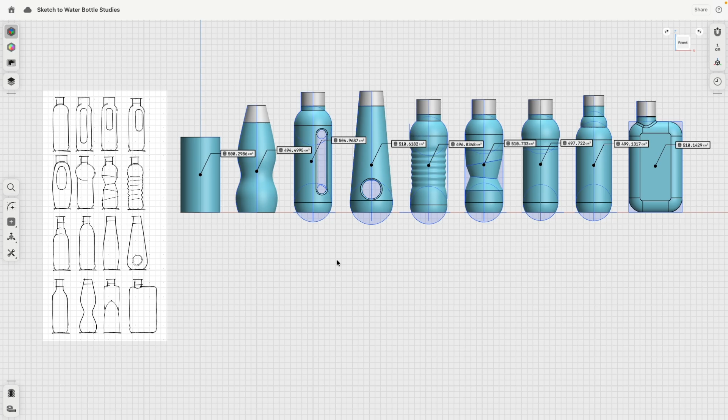Let me show you how I structured this design. So I brought in this image. By the way, you can bring in the image via the add image command, and then you might have to position and scale it correctly. The download link to this image is in the description of the video.

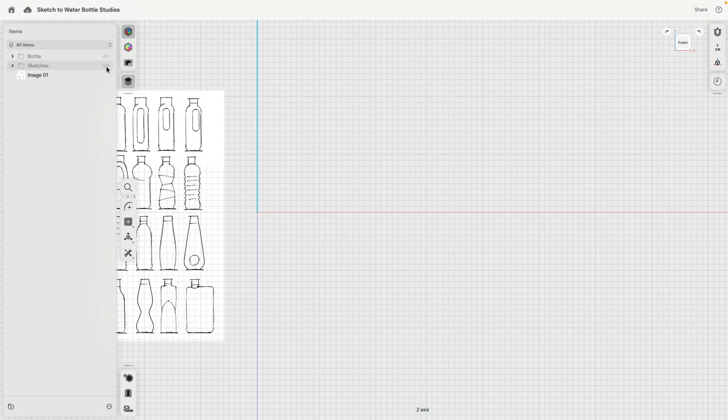And then I created a sketch, as you can see here, and this sketch has all sketches for these different bottles included. Here's a rectangle—I noticed that a rectangle 3.5 by 13 centimeters is around 500 milliliters.

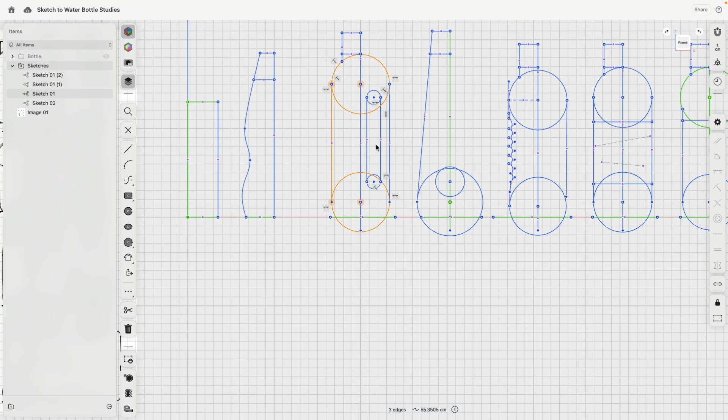So then I made a copy of this. You see here I added a spline, using the fit point spline. Then I brought in circles and lines, made circles and lines on the inside, revolved those, and cut this out.

Here I used just the control point spline to create this wave line and so forth. So you see the geometries are all really very basic, and even here the last one is just boxes.

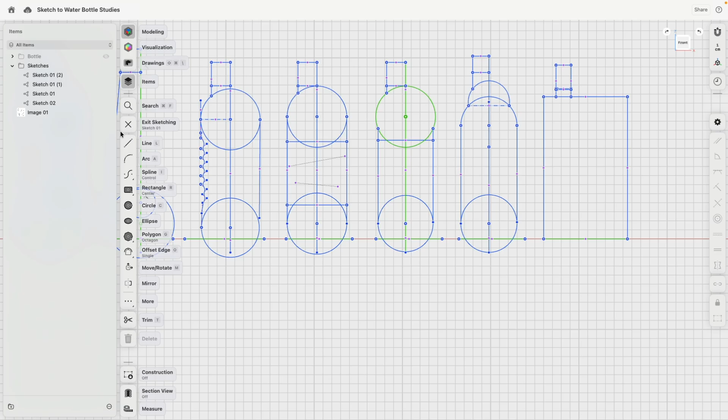And then you can use the modeling tools: revolve, boolean, extrude, and cut. Here this is lofted, and you see these edges were filleted. Then these edges were filleted, and then here this part was filleted—so a little bit more detail.

But the main idea really is to keep sketching and 3D modeling to the bare minimum and produce many different ideas so you can compare them.

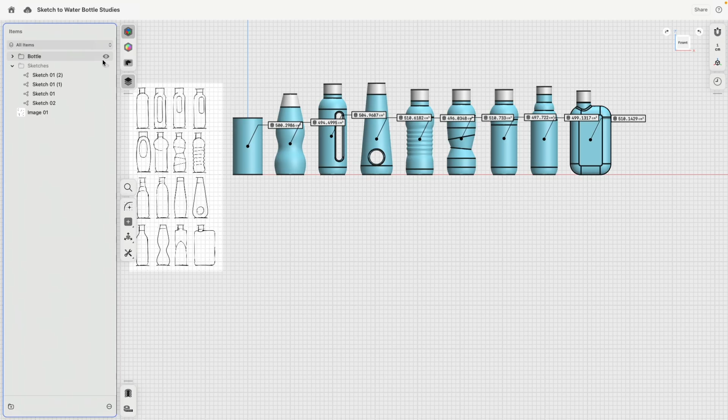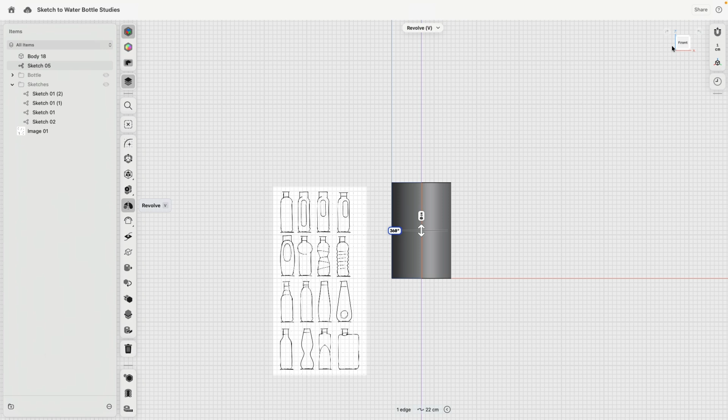Okay, so as a quick introduction, I'll also show how to start. We could create a sketch, and I will turn everything off here. I'll make a line there, there, there, there. Very good. Then I can select the face and an axis, do a revolve, select the whole body, and go to measure.

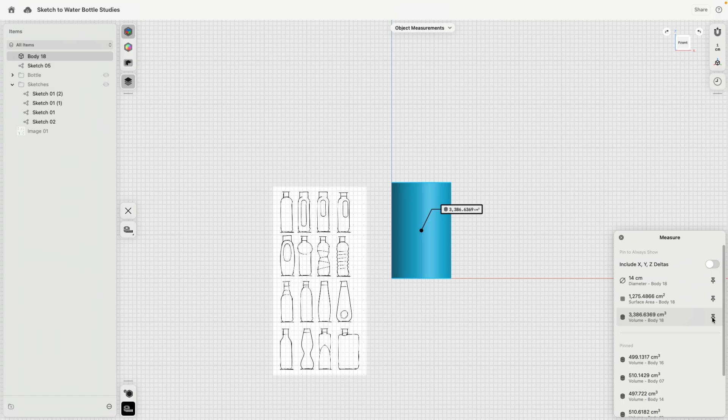Then here I see the cubic centimeter that has to go down to 500—then I have 500 milliliters. So the volume obviously is incorrect. What I can do now is play with the width and play with the height, and you can see how the volume is always being updated.

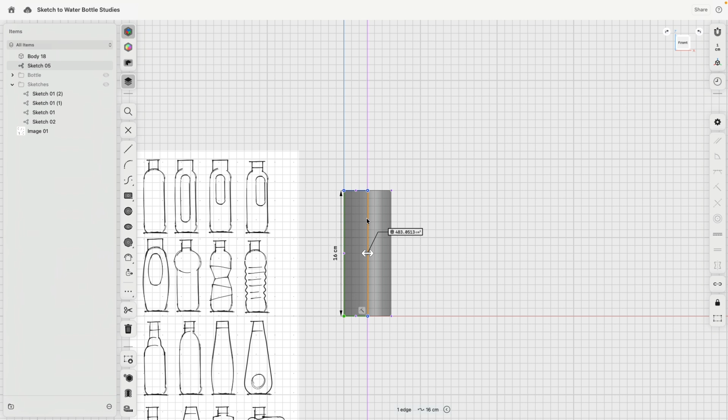So now we are at 483, 800, 700, 500. No? I hope you can see that this is pretty easy to do. There, perfect. Okay.

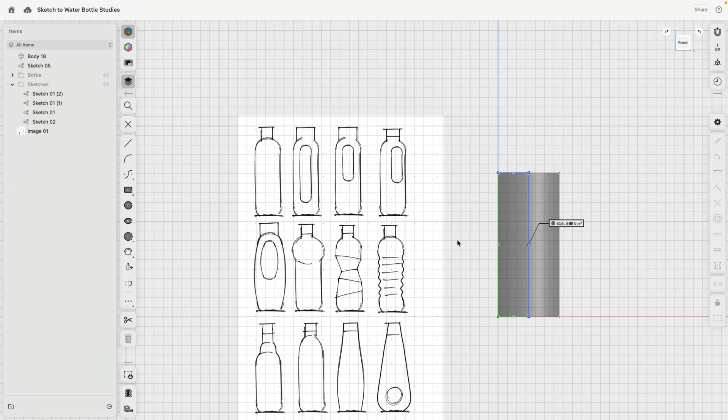Like for sketching, this is all done in the Concepts app, where you can copy and paste and move things around. The same method you want to do here, which is why I'm only working in this one sketch. So I can select everything, go to the move command, make a copy, bring this over, let's say to there.

Very good. We at one point would like to have kind of like a lip or something. So maybe something around 3-4 centimeters. Yeah, to there. Very good. That's fine.

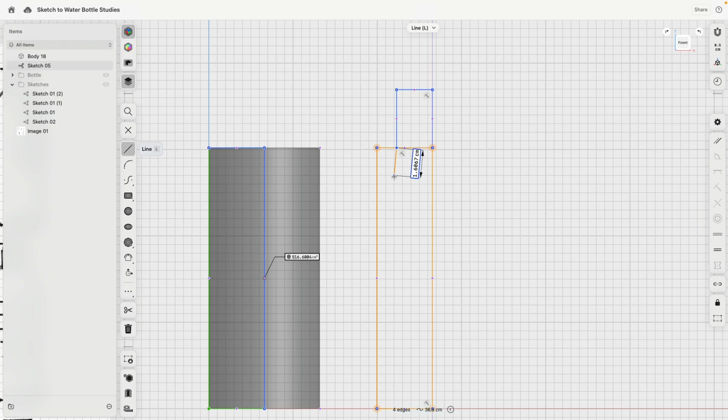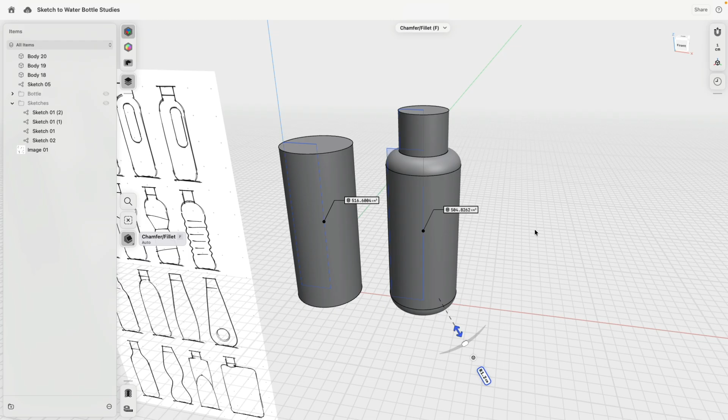Then I do the same revolve, go to there and revolve. Can go ahead, measure. There we are. This is a little bit too sharp. I can select both edges and then round this a little bit. I have to be careful that the fillet is not undercutting, so I might have to move this a little bit more to the inside.

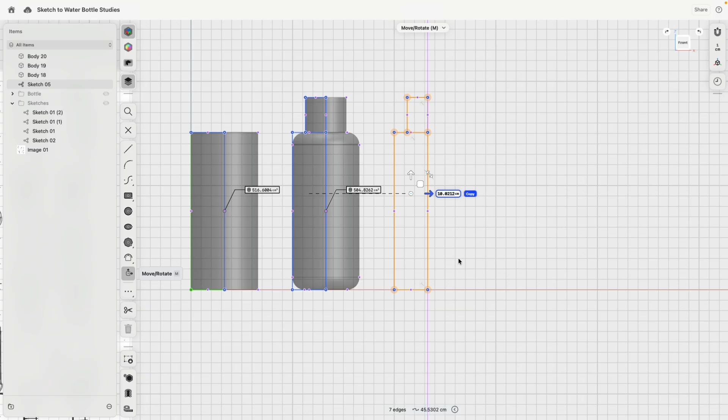Perfect. Cool. So I used a basic sketch and then filleting. I could also select everything, make a copy, bring this over. Again, you see, this is really truly all about mass production.

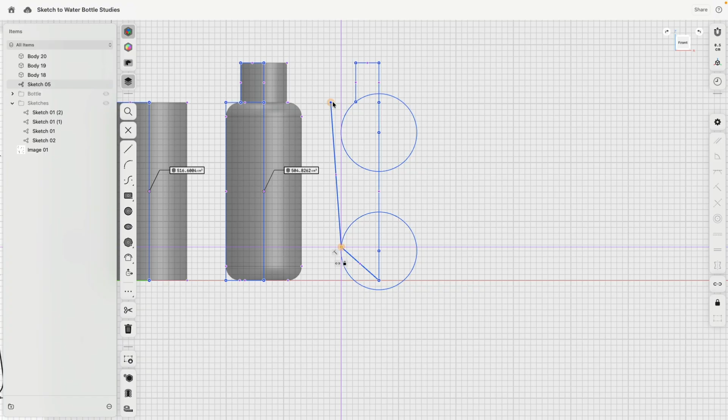I'm going to create a circle here, and I'm going to create a circle there. This line I will delete. This one I will connect to there. This one I will connect and connect. This one can go, but I would like this to be horizontal. This one needs to be vertical, and because these are circles, they have to be tangent. Cool. Okay.

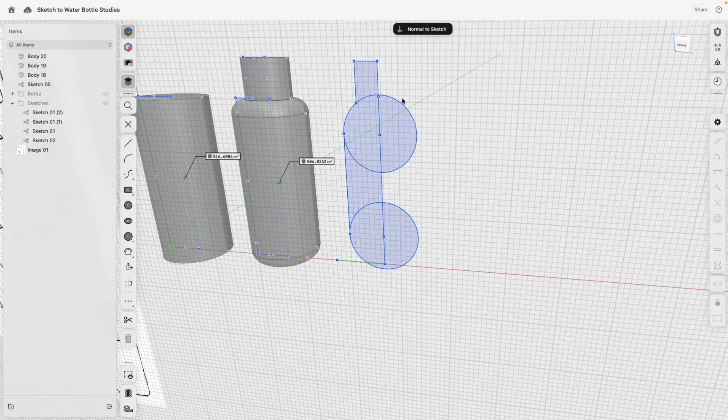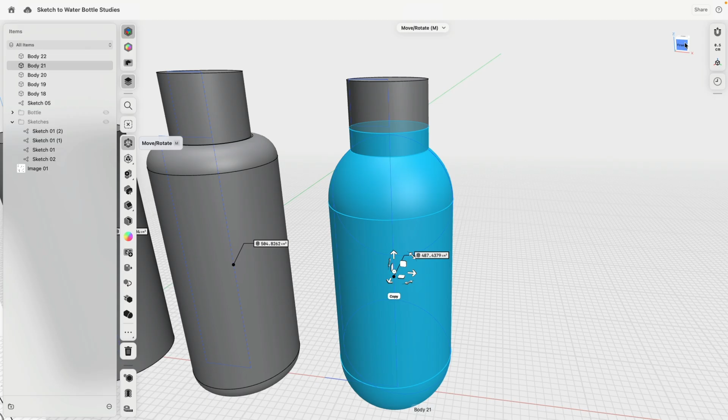We need something here to separate the cap. And then again, you see, when done correctly, this one was not, now it is. We can select these profiles, center axis, revolve, profile, center axis, revolve, select everything, measure, pin it. Very good. Sweet. So we're actually pretty close.

That's good. I can go into the sketch again, maybe move this one a little bit further down. We have to be careful that vertical lines, horizontal lines remain horizontal, vertical. So I'm selecting all those there.

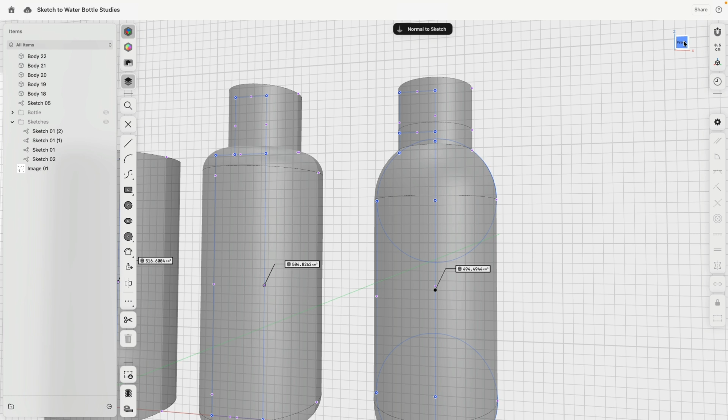We can also play with the width. This is then good to measure what's comfortable for your hands. So we have here a circle, so 6.5 centimeters as a diameter.

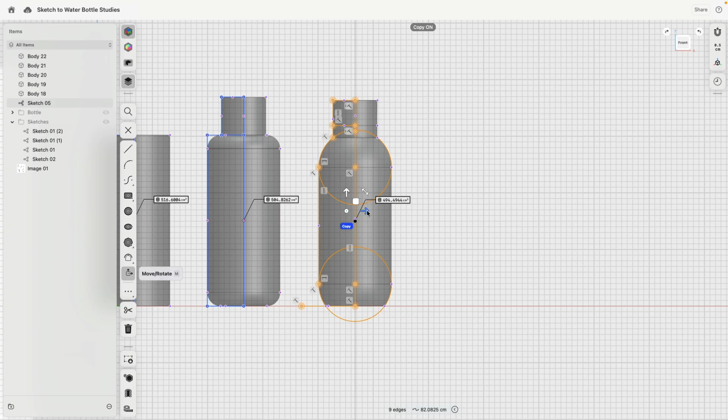I can select this one, make a copy, bring this over. There we are. And yeah, I had this idea of how this could look when there are also other openings in it. So there we are.

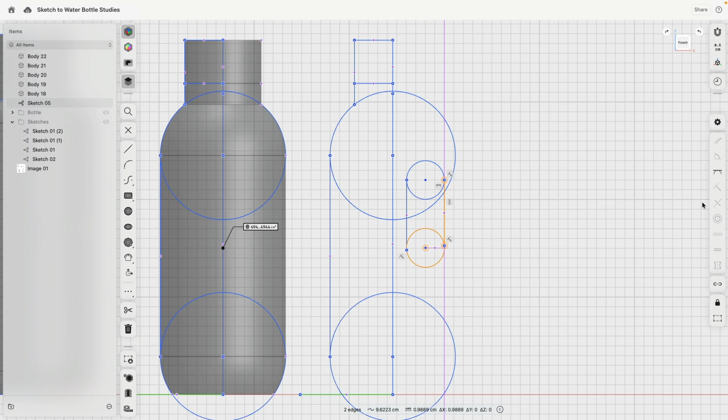See, I connected all this horizontal, vertical. There, you tangent. Same here. Same there. Same there. Cool. Then zack, zack, zack, zack, and revolve. Same task, revolve. And now I need to select that.

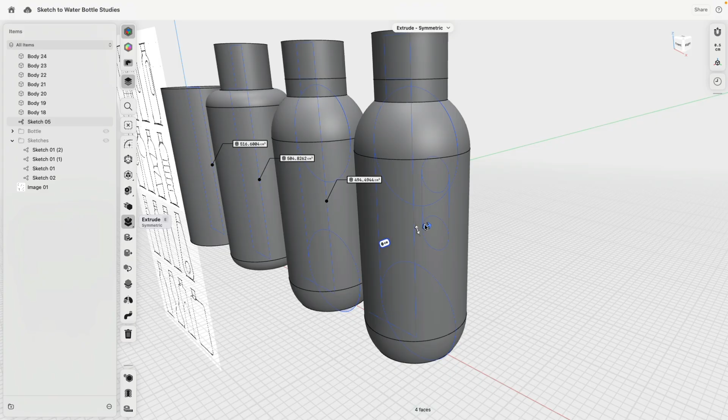So I will select these parts. Then I will turn on the body again. Then go to extrude symmetric, extrude this one out. Beautiful. To make this look a tick better,

we can fillet this a little bit. Because this is on a circular surface, chord width will work better. Very good.

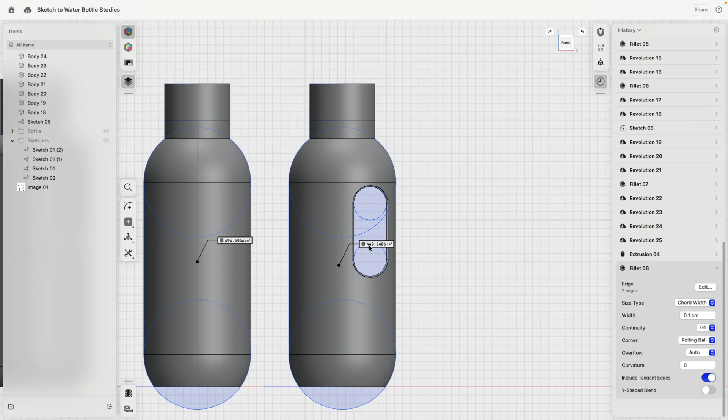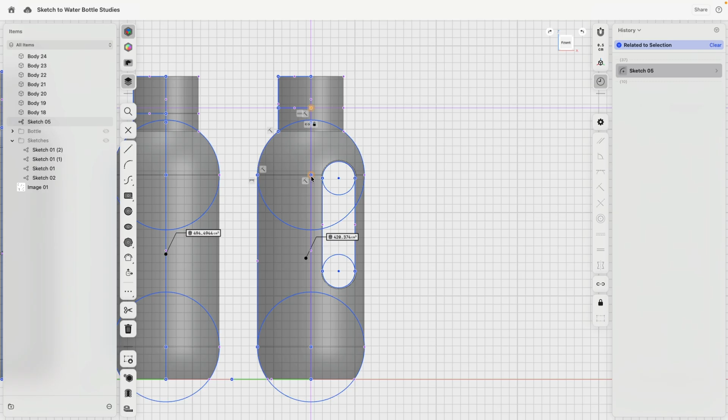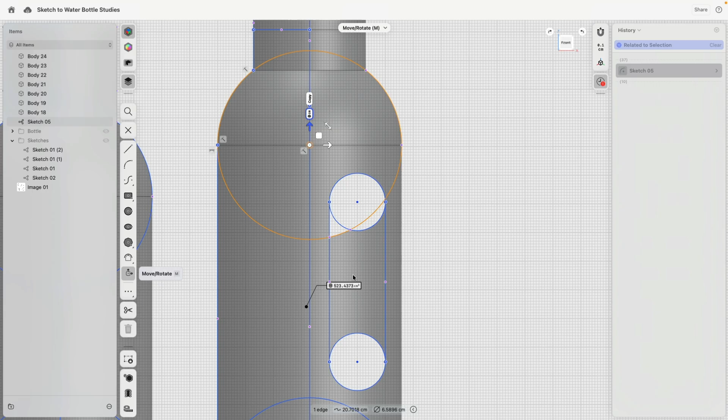Yeah, to get our volume back, we might have to move all this up a little bit. Or maybe with the M tool, bring this down a little bit. Wow, that's a tiny jump. Oh, I see. There's an interesting issue.

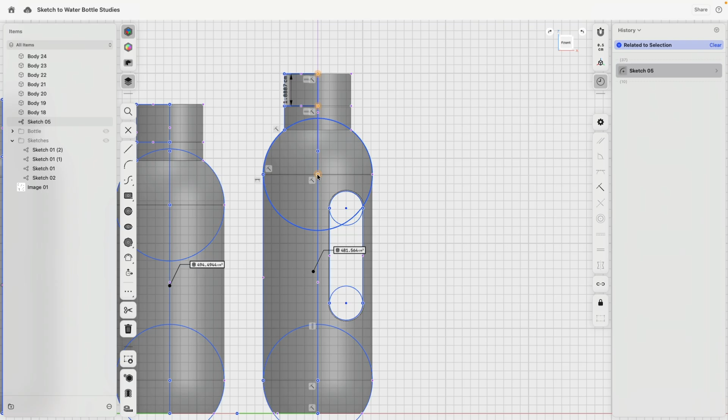Okay, it's all good. So we go to fix, and I would like to add that to it. So here I bring that back, I turn this on there. That's the reason why the volume jumped so much. But you see, with the timeline, that can be resolved in no time.

Maybe make this a tick bigger. There. Okay, perfect.

Beautiful. So now out of just one very basic cylinder, we already very quickly created 3 different parts, roughly around 500 milliliters. Yeah, and then essentially you can continue this design.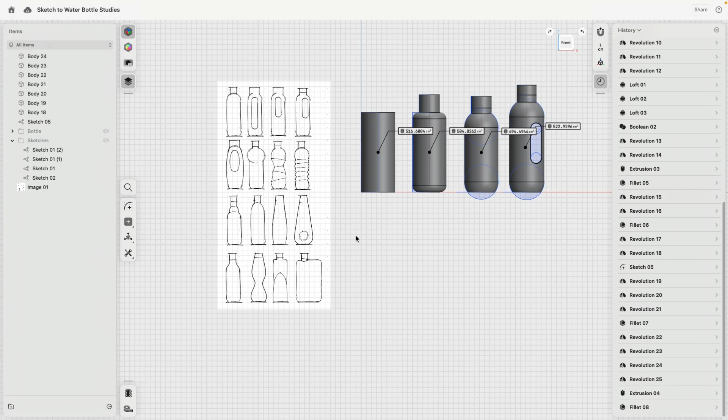I can do 2 more, maybe these 2. So this one here I liked. So I will go ahead and make a copy, bring this over. Then I will add a line here. You will see in a moment why.

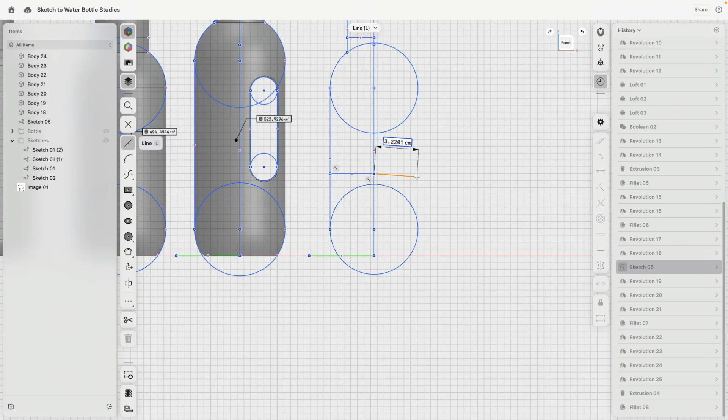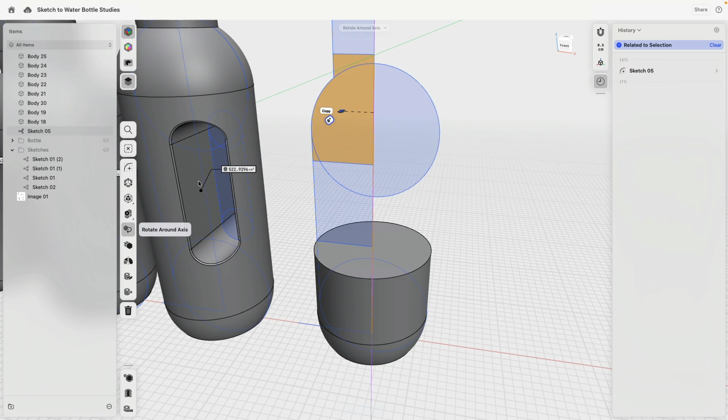And then I will do a revolve. I will do, actually, well, we can do then that way. Maybe here, there. So that I do revolve. Very good. And then how do we get from the piece on top actually to the other part? I might need to adjust this.

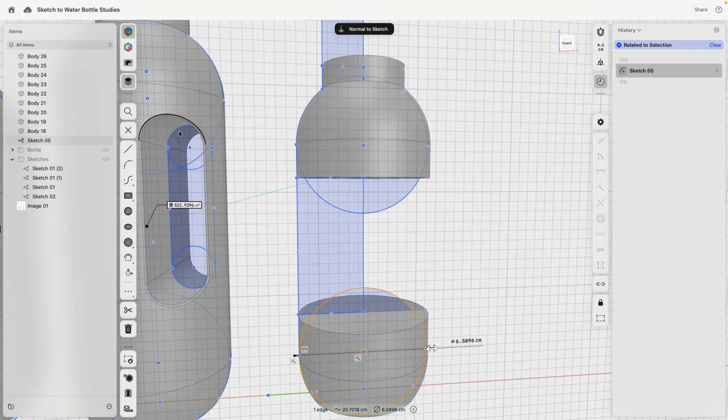And then this circle, that's actually one of the great things of Shapr3D. We don't need to work with construction planes to move sketches. We can simply select a sketch, make a copy, and move this around.

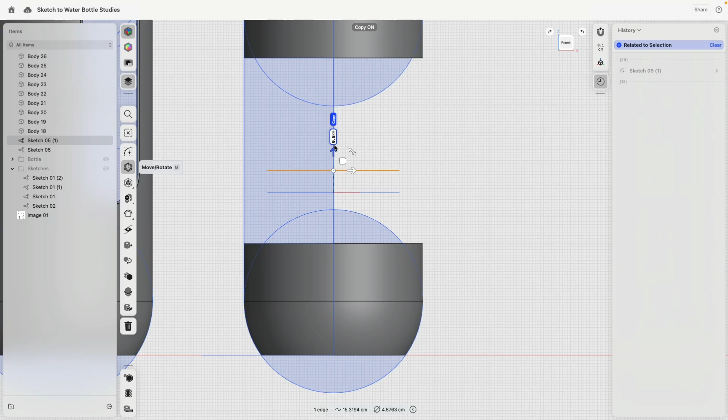There is number 1. I'm going to scale this down a little bit. Then I will make another copy to there, or I can just rotate it. Oops, don't make another copy. And this sketch I rotate a little bit.

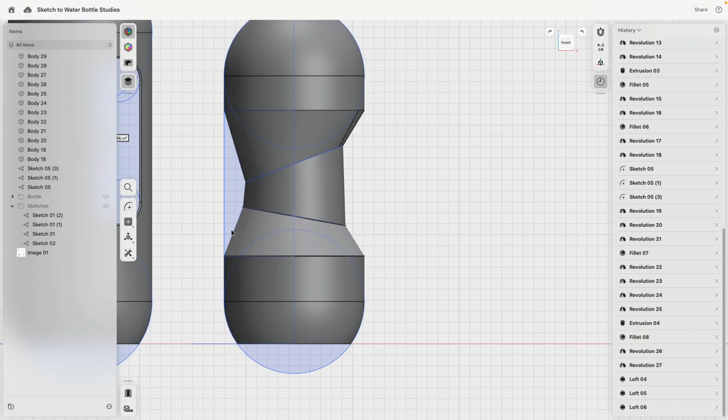And then I go loft, step by step. And that is how easily you can then create these different transitions. And then wherever these sketches are, that then defines how this actually looks.

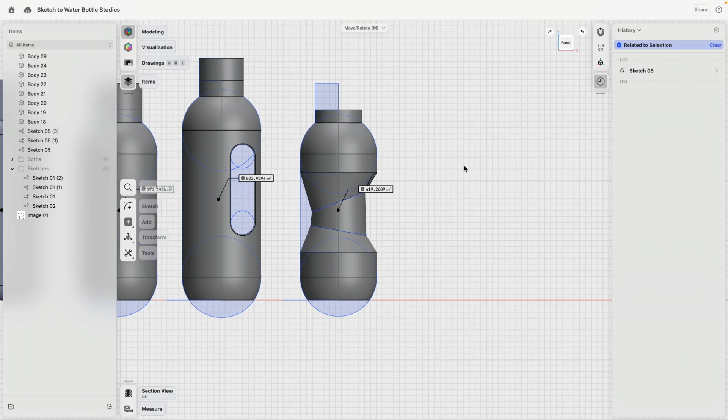Then we have to select everything one more time, and you guessed it, another volume pin. There we see we lost quite a lot. So going back, so that

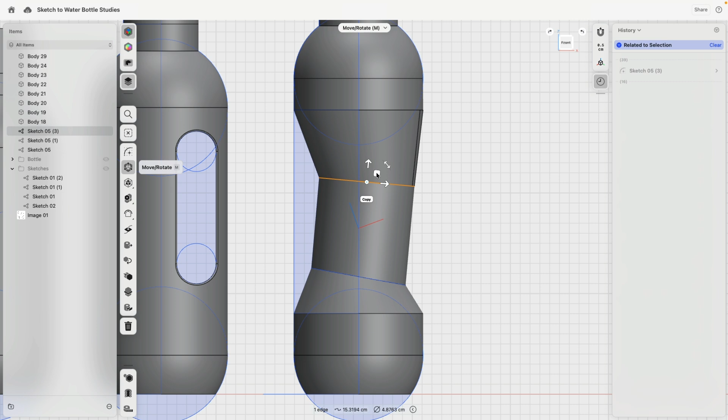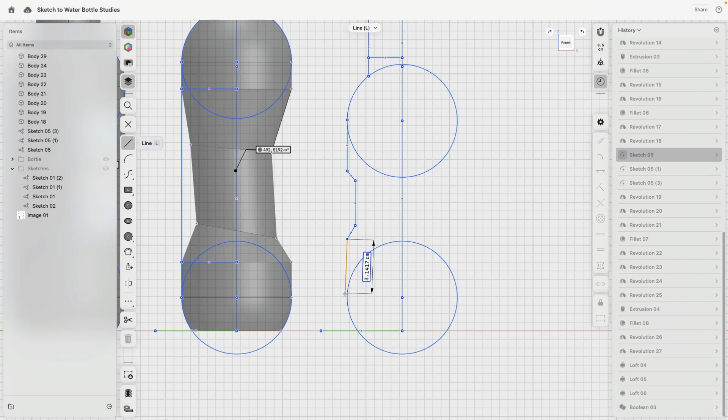Last one with these rounded pieces. There we are, bring this over. Very good. In this case here, that one I delete. I could think about very basic designs where this is just a cut, or here we have something that goes more inwards, or with this rounded piece. There are actually two interesting ways how we can do this.

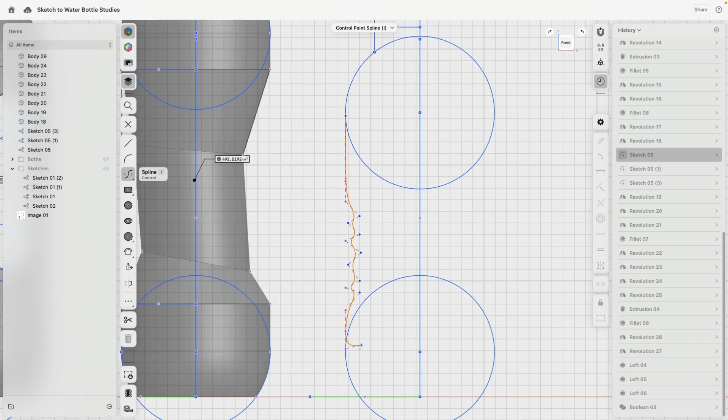So I go down, 1, 2, and then zing. Now I can use, for example, the grid to draw this better. Again, 1, 2, and the end. This one here I bring up, zooming out a little bit, and the grid is turned on.

Very good. So I'm using here the grid to very quickly position these elements. All those can go up a little bit there. Also here, tangent and tangent. That's important.

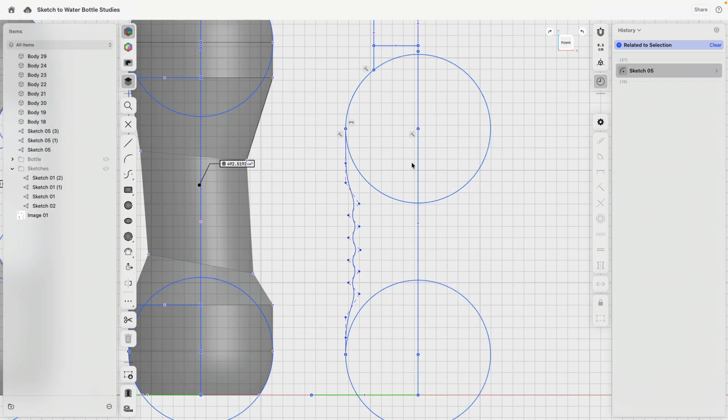Very good. And then when we do our revolve, there we have this. So this is like version 1, how this could be done. I will bring this one here down simply as a guideline.

So I can see, hey, those need to be more there. So actually, now you see this curve lines up there again. So that's one way how to do this. Nice and organic.

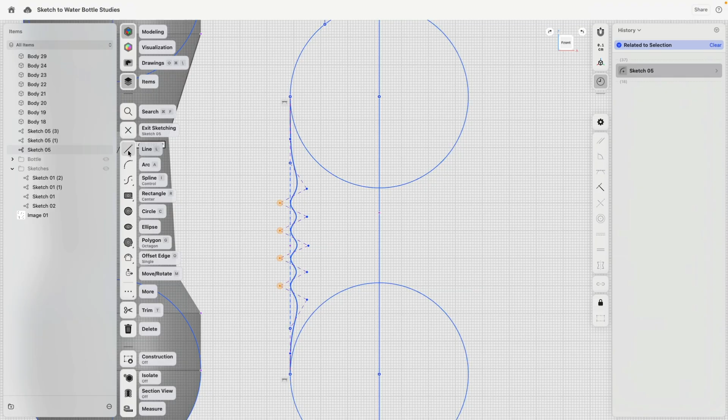The other, maybe a little bit more labor intensive, but can be more precise. This is actually a good case of sketching quickly and now sketching more precisely. This definitely, people will understand what the design intent is.

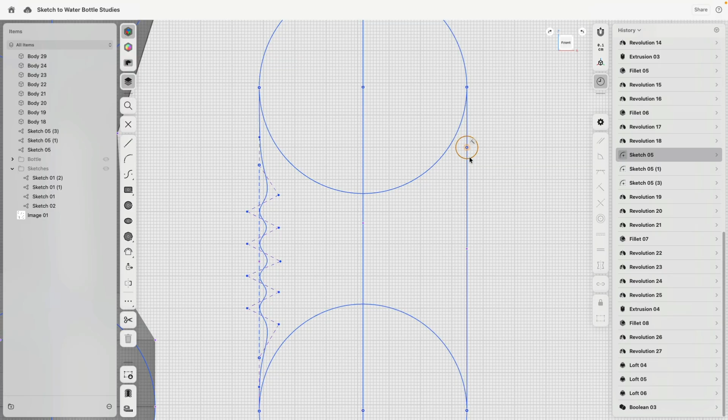I can create myself here a small circle. Then that circle, I will create a pattern. Let's say 8. Zip, bring this down. Okay.

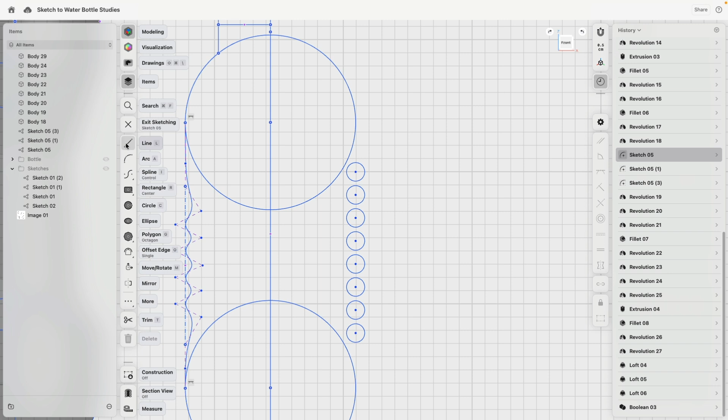There, this line is a little bit cranky. Oh, one more time. So there, and tangent and tangent. Perfect. And then this I will snap onto it.

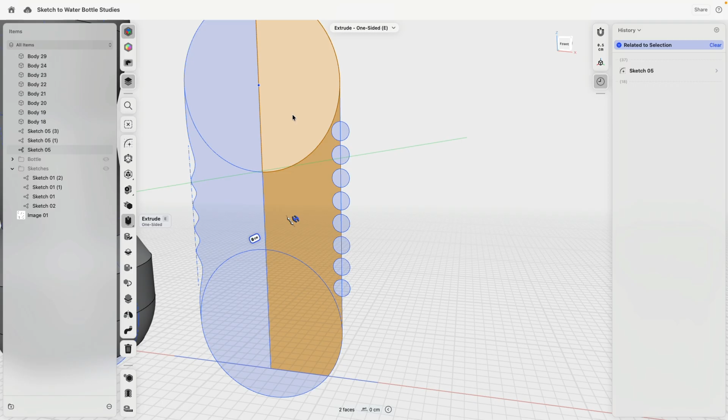And now what I can do is I can select all these volumes. Now, this way, if I do a revolve, you see I have these grooves. Or if I will then go ahead and select these parts and there and do the revolve, we will add them together.

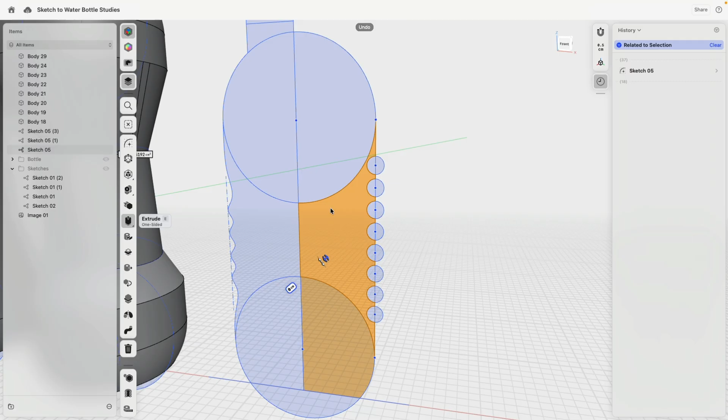Last quick demo, I could do this, for example, this way, and this is always about how to speed things up truly. So I made a piece, and you see if you really know how to model quickly, like in this case, I'm breaking this up more as a modeling task instead of just only sketching. Now I can create these pieces out of just one revolve command.

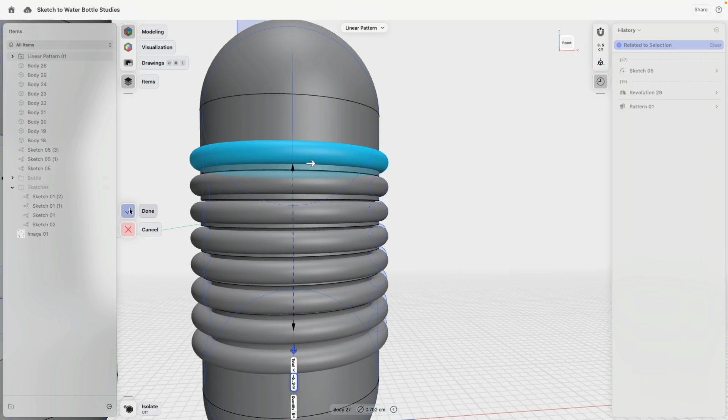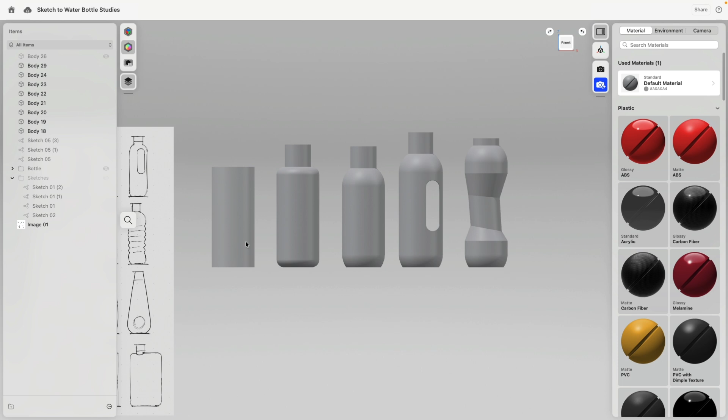So the last one was kind of like a mixed bag of quickly sketching one profile smoothly, then drafting stuff more precisely, or then just only making one circle and then using the modeling and repetition commands to build that part. Okay, beautiful.

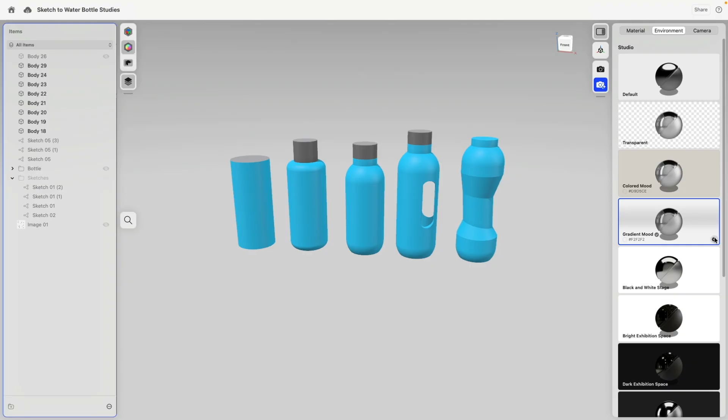The last step, maybe now to visualize things, is also we have all these bodies, for example, for the fluid. Let's say here you'll have one color, all the caps maybe have another color, you can go to your background Gradient Mood. We have this image, we turn this off, then the ground plane actually snaps to it.

And then very quickly this way, we can then also have these bottles nicely next to each other. When you present this stuff or when you work, try also really to have an even spacing between the bottles so it's not so chaotic. This is one of the main reasons why the sketch looks actually quite nice, because it's very easy to read. There's a certain order to it.

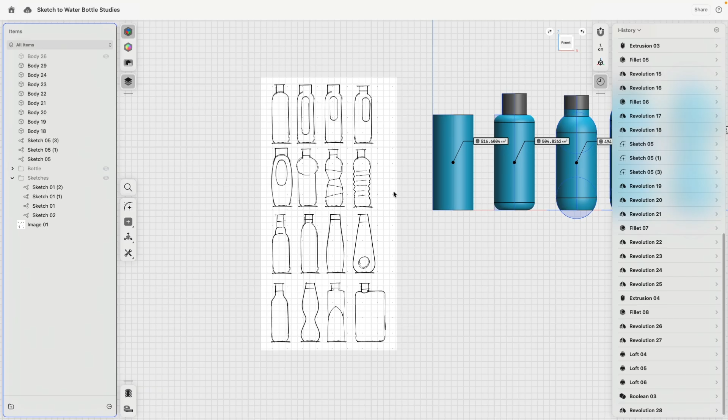And with that, I basically covered everything what I wanted to say. That's it.